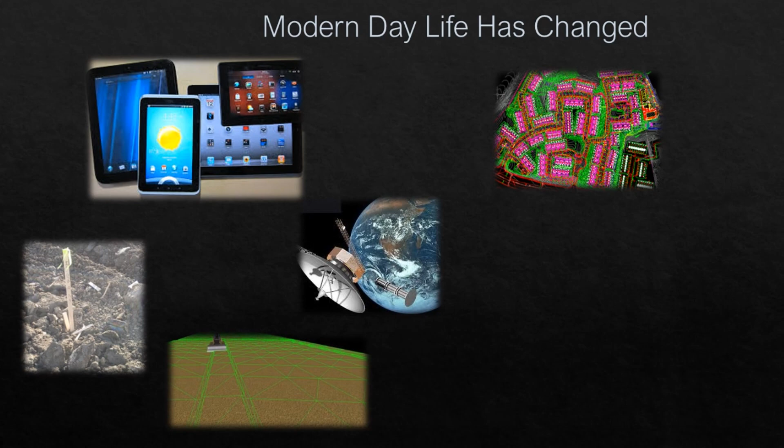Manual estimations, measurements, and staking has migrated to using laser levels, wire mesh renderings, and GPS drones and rovers. For vehicles and equipment, analog sensors have evolved to digital and local area networks, wireless, satellite, and cellular telematics reporting technologies, autonomous vehicles, and haul systems.

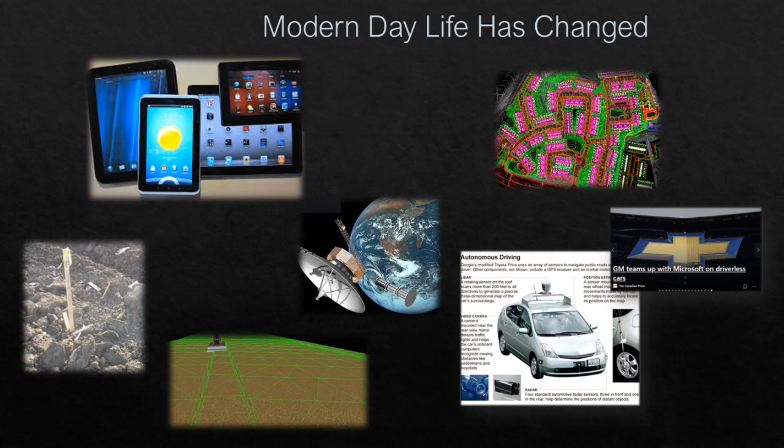Today, we are connected more than ever before, real time, and can make real time decisions and changes. We need repeatability, reliability, and accountability.

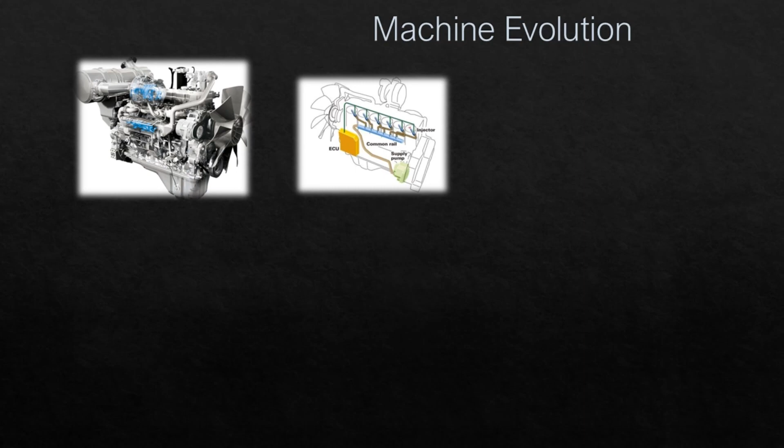Engine emissions have driven many developments in the equipment industry. In conjunction with engine design, communication between components has also evolved. From mechanical fuel pumps to electronically controlled unit injectors capable of multiple injections throughout the combustion cycle, these controls yield improved fuel economy, higher horsepower, and improved matching of engine, transmission, and hydraulics for increased performance and fuel productivity efficiency.

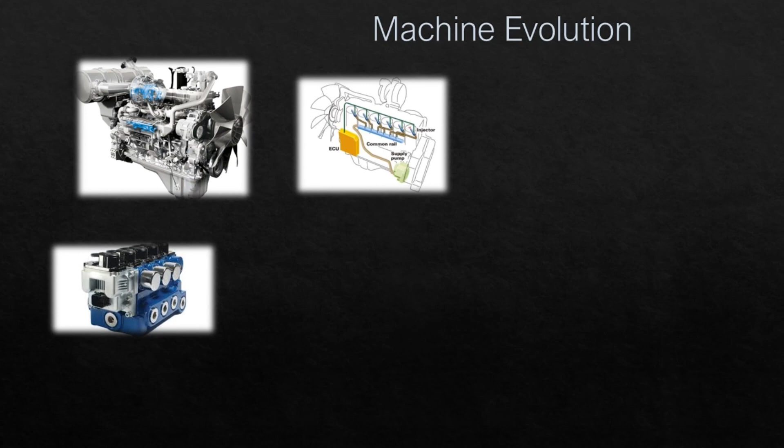Other improved technology applications, such as ultracapacitors, has opened the door to hybrid machines, not just cars, but also excavators and electric drive machines. Construction machines have evolved and continue to evolve.

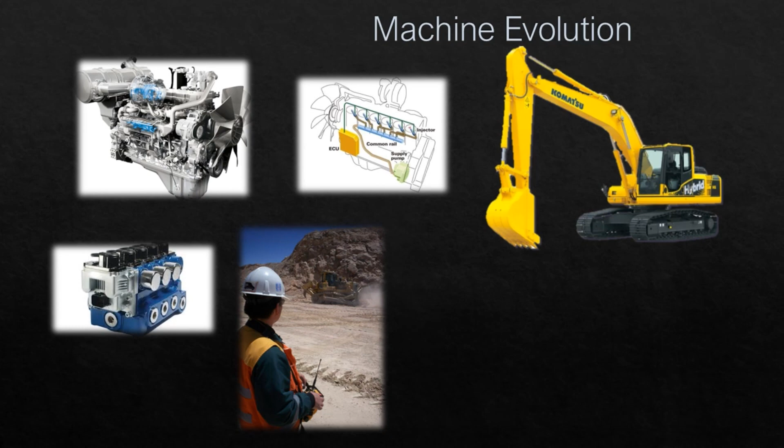Aside from engine emissions, a great deal of technology has been developed and implemented in large-scale operations in the mining world, where safety requirements are strict and fractions of a percentage point improvement have large and faster payback.

Enter autonomous haulage systems.

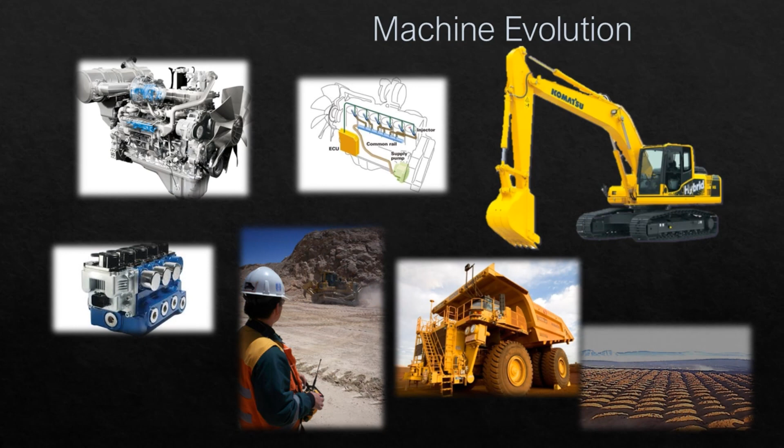It is interesting to note that driverless cars and on-highway trucks are still making their case for implementation, when in fact autonomous haulage has been in commercial use, not just trials, in the mining industry for over a decade, 13 years in fact. But it began much earlier, with Komatsu testing in Japan as early as 1990.

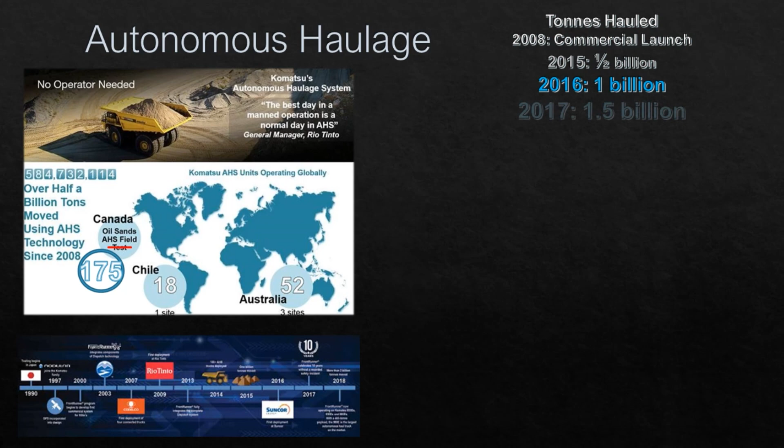Consistency, predictability, and long-term planning of mine sites has allowed the use of autonomous haulage, driverless haul trucks. With more than 150 machines right here in Canada, these mighty machines haul 300 to 400 tons per truck, eliminating errors and inconsistencies without human detriments.

Simply through implementation, sites experience an immediate 15+% improvement in reliability due to eliminating operator error, in addition to increased production. While we are not ready for complete autonomous implementation with construction equipment just yet, advances in technology are accelerating, and began with machine control in motor graders, dozers, and now semi-automatic grading in excavators.

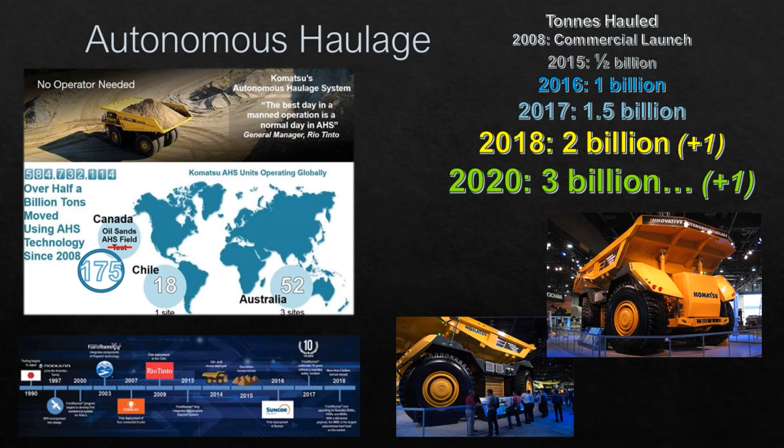Let's leave the autonomous haul trucks behind for now and look at other ways automated technologies can influence what we do. Let's take a moment to discuss some basic advantages realized when implementing grade control systems.

First, conventional grading. This relies heavily on the human element. Experience definitely helps. Unfortunately, hand-eye coordination leaves room for improvement, especially between grade stakes, even with well-seasoned operators. As a result, there is typically unplanned rework.

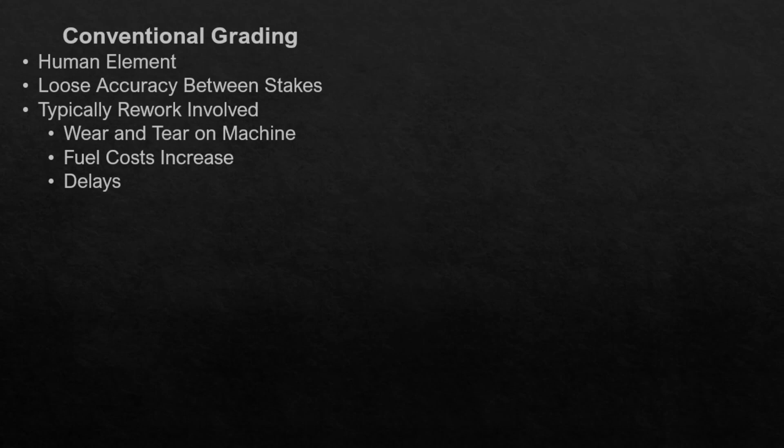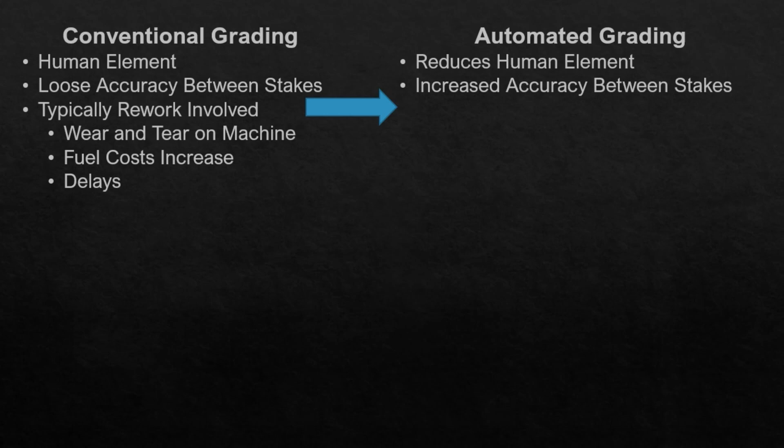This rework adds to extra wear and tear on a machine, increases fuel costs, and takes longer. You can probably guess that the addition of automated grading reduces the dependency on the human element and need for experience. Work performed is consistently more accurate over the entire application, which significantly reduces rework and thereby lowers wear and tear, reduces fuel, and speeds completions.

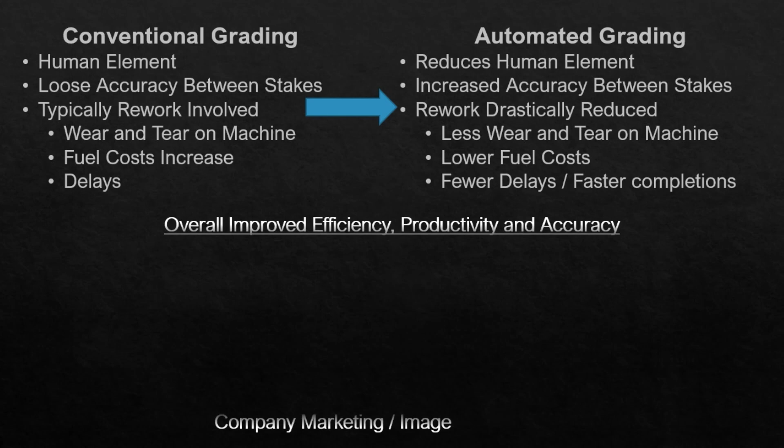With the addition of automated grading, there is an overall measurable improvement due to better use of assets, reduced—not eliminated—costs of surveying, and lower material costs.

Improved company performance adds to competitiveness, attracts new talent to the workplace, and helps bridge the experience gap. Existing operators perform better and are less strained by the end of the day. And improved results can improve the overall company image.

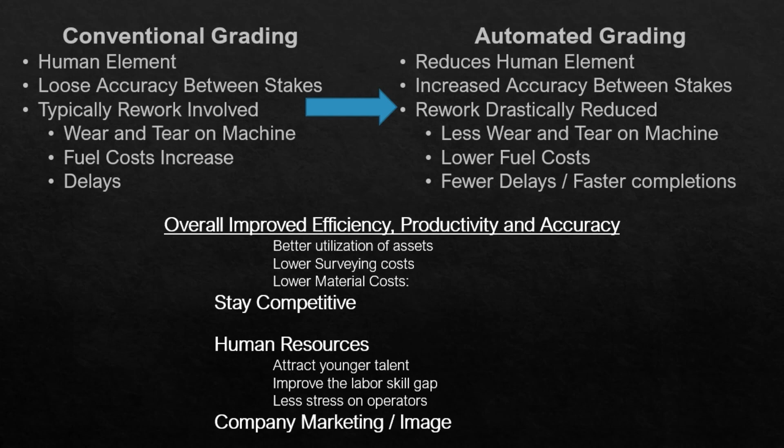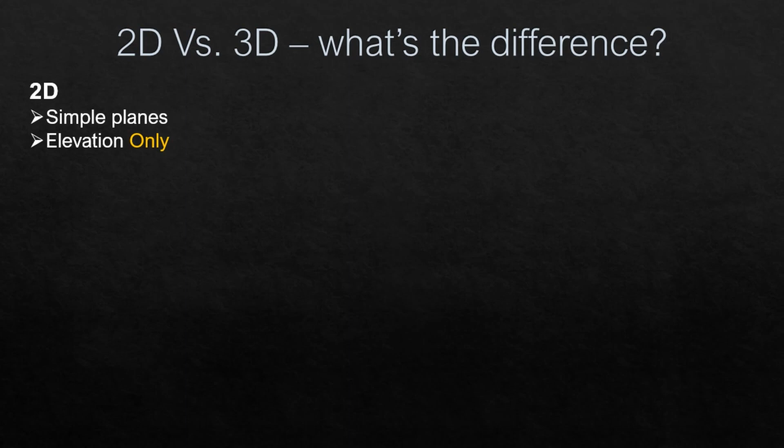A key differentiator in capability and application can be described with the terms 2D and 3D. For 2D, think elevation only, one point at a time. With no location relative to the position on a job site, there is need to re-establish a reference point, zero, or rebench at each new location or application.

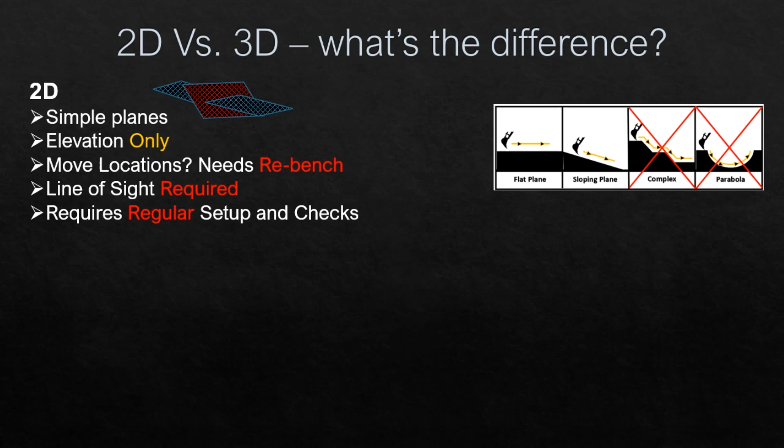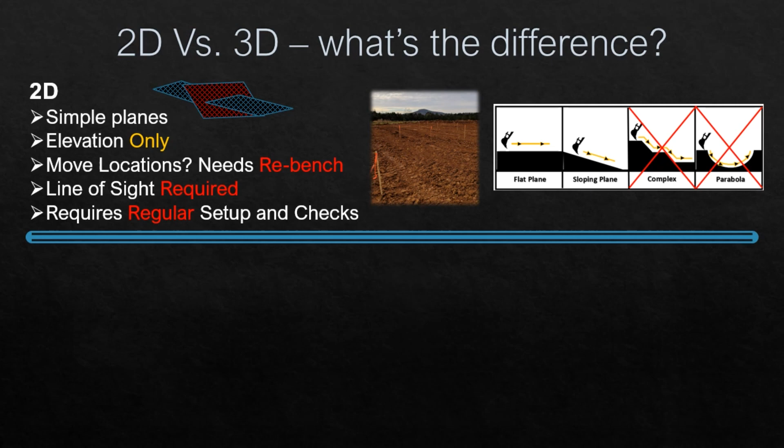For simple planes where grade does not change over large areas, lasers can accomplish one or two surfaces but still need regular checks. Lasers used for correction require line of sight. Without lasers, more reference points, for example grade stakes, need to be established. Creating more different slopes requires changing the setup for each new situation, but complex contours cannot easily be accomplished with only 2D systems. So what difference does 3D make?

Think GPS. Location on the job site is known, the horizontal reference, as well as the required elevation, vertical reference, at each location. For complex contours or jobs with multiple grades, 3D is a clear winner. Simply put, 2D is simple, flat surfaces. 3D can do everything 2D can, plus more complex contours. It is GPS referenced across the entire job without the need to constantly re-establish a reference point.

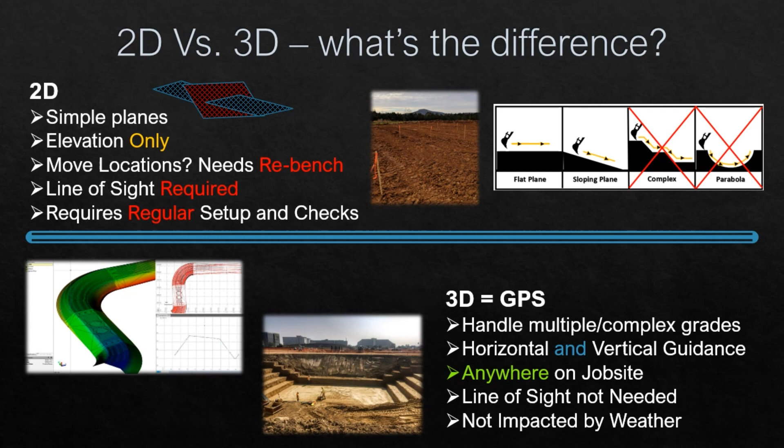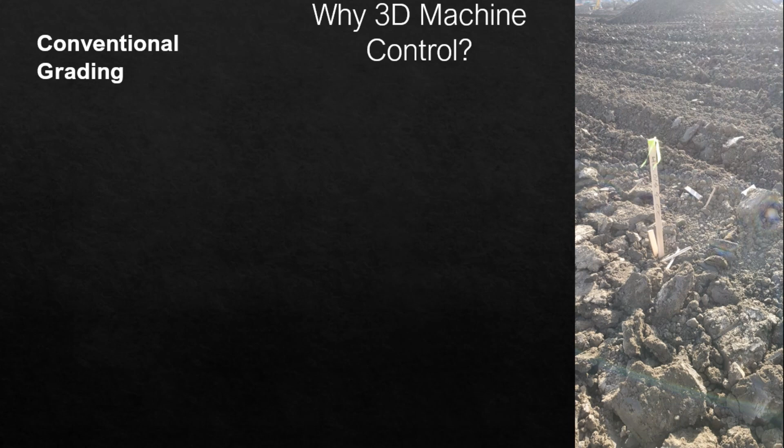Understanding the conventional grading process provides a basis for understanding why 3D machine control is necessary for anyone to remain competitive. Without knowing the location of design features and required grade on the job site, the operator is solely dependent on grade stakes. These only provide a small picture of the entire job site, and grading between stakes is still at risk for inaccuracy.

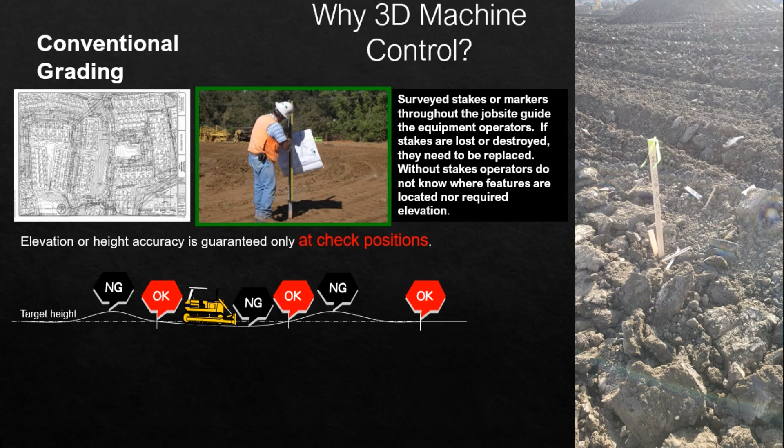Many times, this takes multiple passes and many restakes before final grade is achieved. Even a very skilled operator is challenged to keep accuracy at the blade within a tenth of a foot, or about the size of a golf ball. It goes without saying that the more material you move, the more cost you incur. It is best to move only as much as required.

So, what if we introduce more consistency to the construction job site? How can we achieve 1/10 of a foot accuracy consistently across the entire job site? Enter grade control.

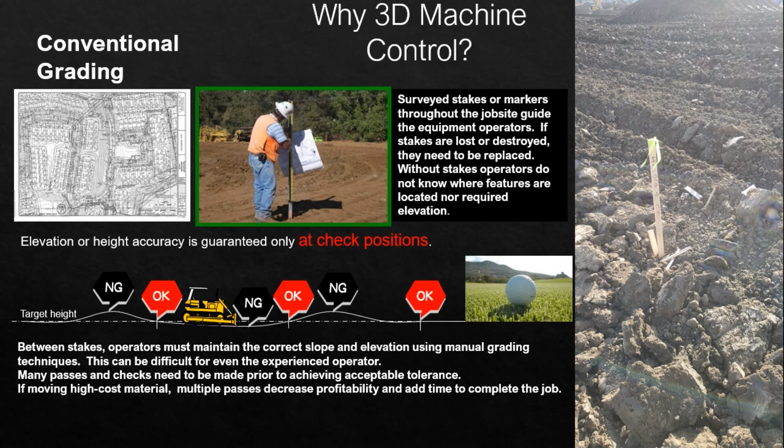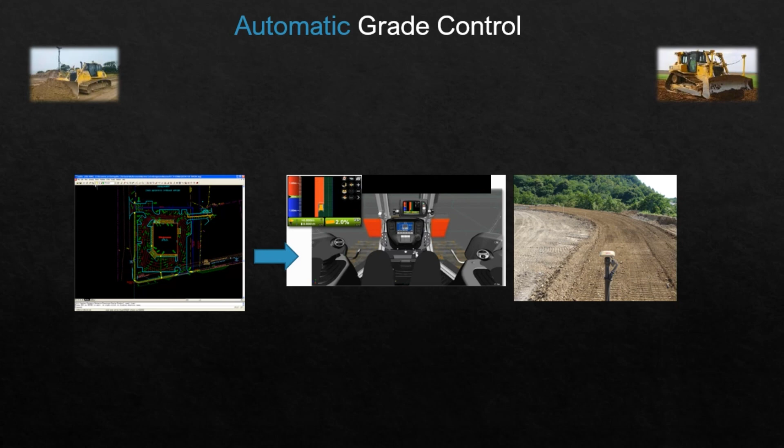With 3D grade control provisions, the plan can now be placed in the hands of the operator. A display shows where the machine is located on the proposed job site, as well as the entire site around the machine. Work around the job site is quickly determined for the day and where the site either needs fill material or needs stripping. With location on the job site known, stakes are no longer needed to show feature locations or proposed grade. The machine is capable of cutting to grade more accurately than before and thus substantially cuts down the time needed to complete a project.

3D grade control began with motor graders and has migrated to dozers, but what has become conventional grade control is good for finishing grade only. Enter intelligent machine control.

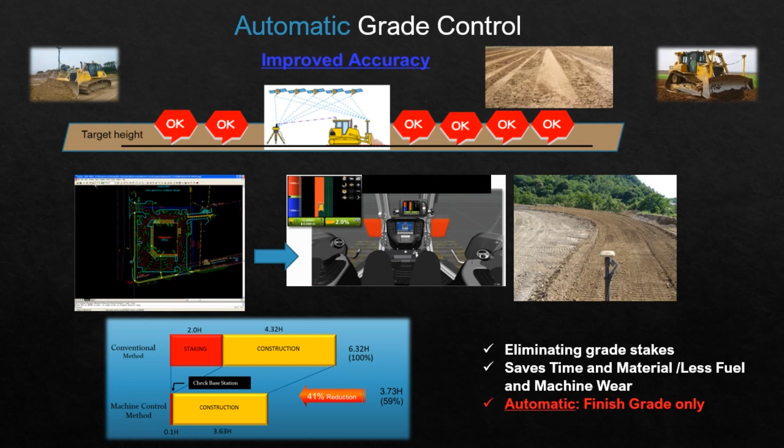This dozer is fitted with machine control. Can you tell? It looks as though some things we might be used to seeing are missing. This is IMC, Intelligent Machine Control, the next machine evolution, a truly integrated machine. IMC provides even more instant returns. Every operator can achieve better results like they have many more years of experience and maximize machine performance, not only on-grade performance. So what makes intelligent machine control the way of the future?

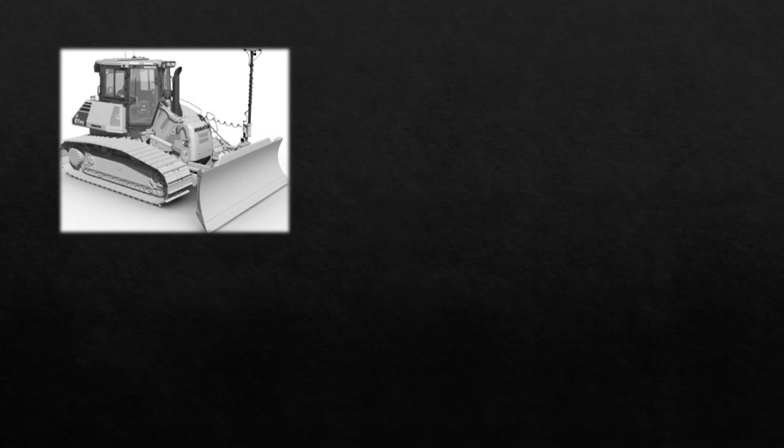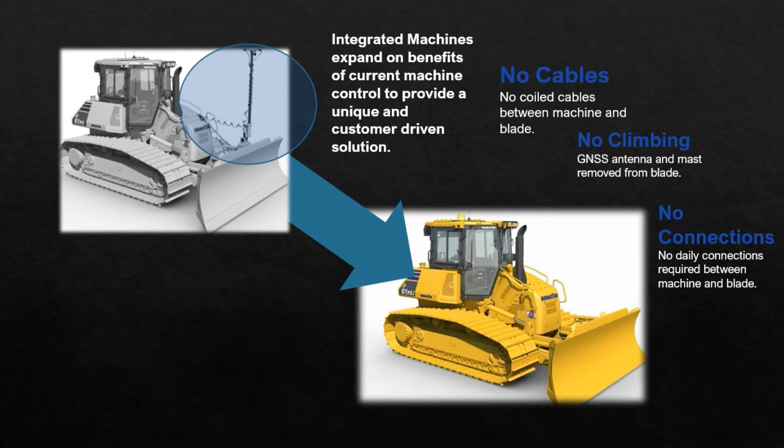Integration. Integration is much more than simply factory-installed mounting points, harnesses, hydraulic hoses, and valves to complete a grade control system. As a start, an integrated machine incorporates sensors to eliminate external harnesses that aftermarket systems cannot avoid. No cables, connections, or climbing is necessary since no components are installed or removed at either end of the workday. There are benefits to pre-wired machines, but the difference is intelligent machine control integrates with the main machine to maximize overall machine capabilities and performance, and therefore maximizes production and improves finished product, much more than simply finish grading. This first truly integrated dozer appeared on the market in 2013.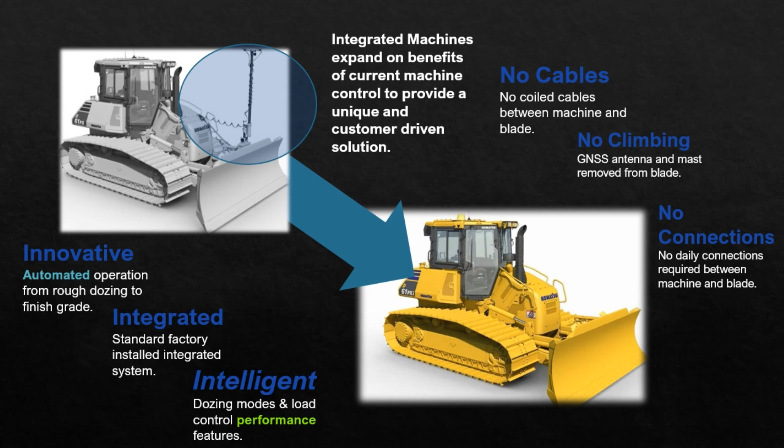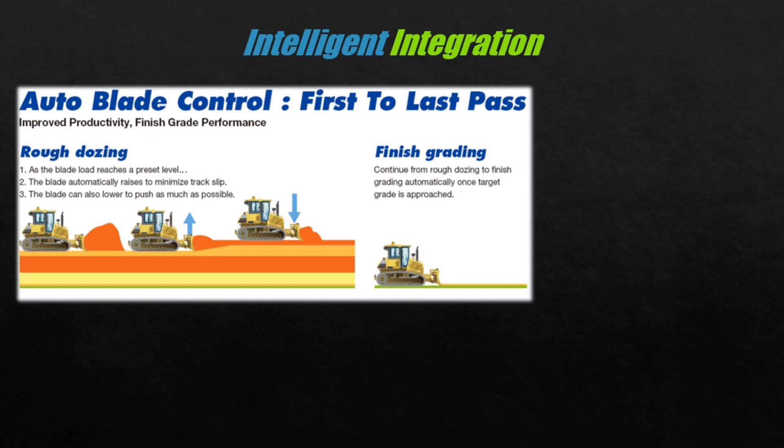What does intelligent integration do? In combination with integrated sensors, in 2013, Komatsu developed the first operator-selectable dozing modes. These dozing modes optimize the dozer for various applications and load types to achieve maximum production, even used long before reaching finished grade. These modes allow for the integrated machine to engage automatic blade operation without operator interaction from rough cut all the way through to the final finish pass, first pass to last pass.

Traditional aftermarket systems or factory-installed machines cannot engage automatic blade control until approximately half a foot from the target surface. In short, this means maximum blade load for each pass from the beginning of the job provides maximum material movement and more utilization of the machine automated controls.

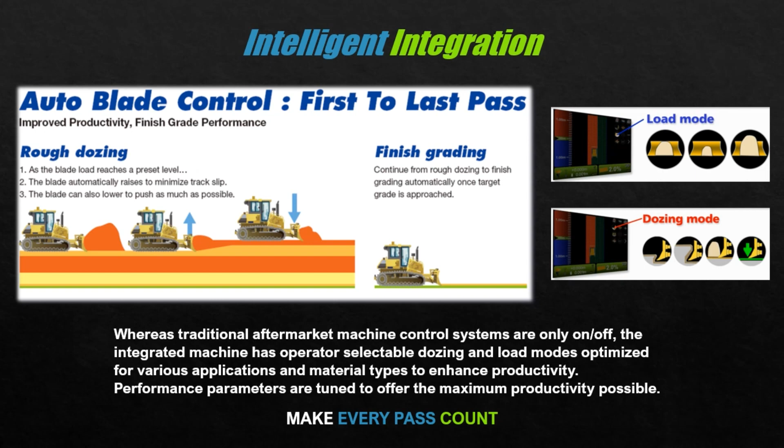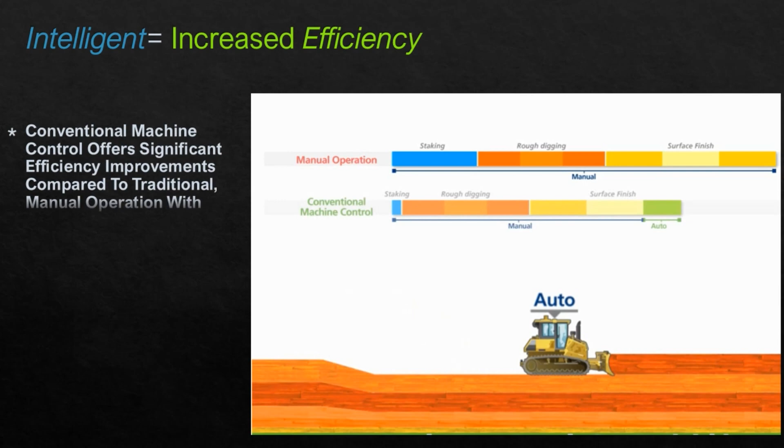How does intelligent machine control compare to grade control systems? Much of the advantages of conventional grade control systems are applicable: reduced staking, improved grading. But intelligent machine control goes further, reducing the passes and time before the finishing pass.

A quick review. Going beyond grade control to intelligent machine control means using assets more effectively through automation in more applications.

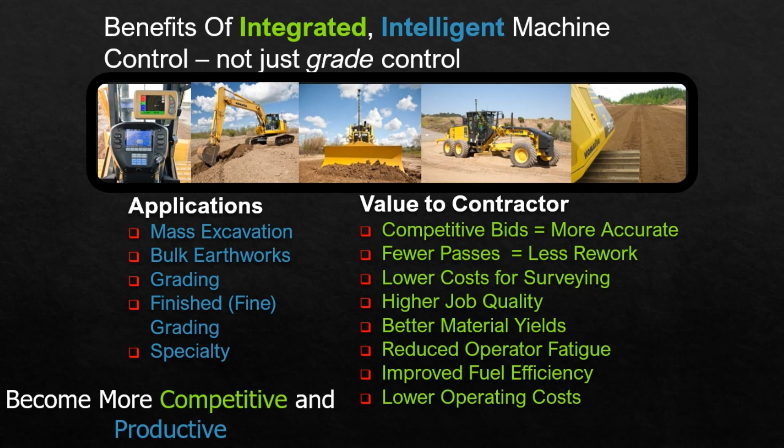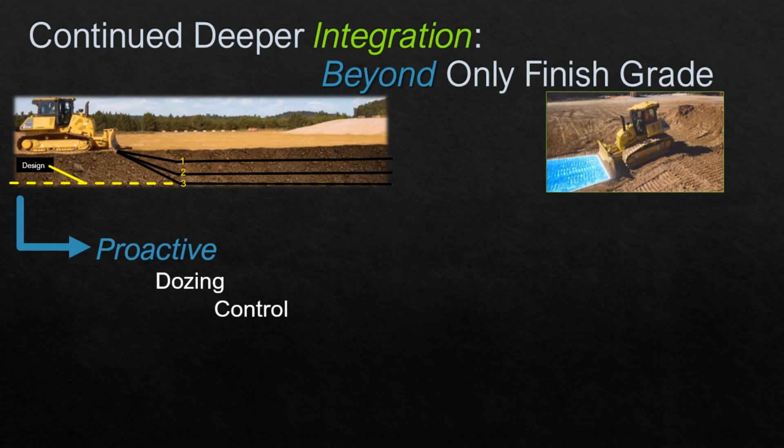It's been said that humans have prospered because of two main capabilities tied to vision: physically seeing danger and also vision to anticipate the future. In the next evolution of intelligent machine control, we in effect give a dozer eyes. By knowing the contours of the surface ahead of the machine, it can anticipate and proactively adjust the blade as it encounters the contour, rather than waiting to feel the load increase, then making adjustments.

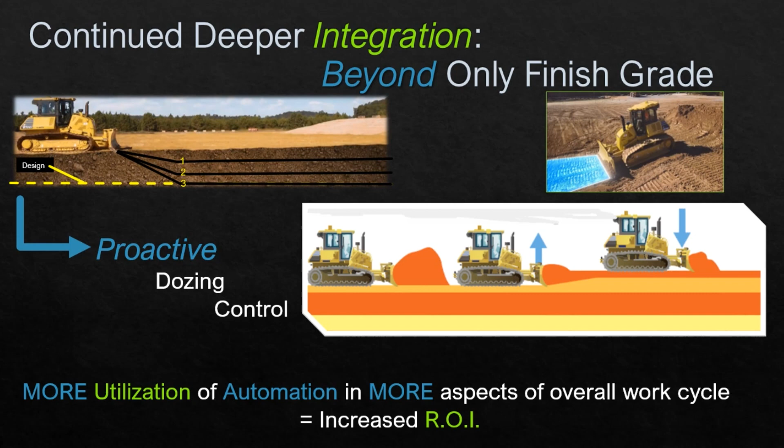Knowing the contours of each step of the job can improve consistency as the job progresses. Consider backfilling, where specific lifts are needed to achieve compaction specifications. Conventional grade control would simply operate at finish grade and fill in batches, or need to be manually overridden by the operator. Manual, not automatic.

With proactive dozing controls, lifts can be pre-programmed and reference the existing surface to achieve consistent lifts while still matching the finished design as subsequent passes are completed. Fewer overall passes, consistent, repeatable results, and less rework using the automatic controls, much more.

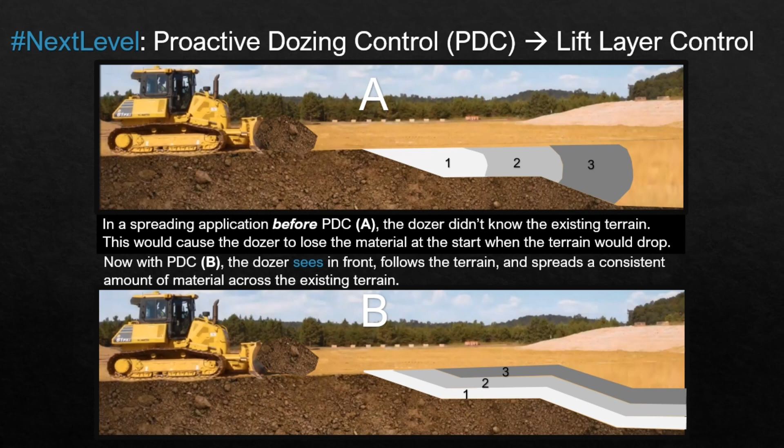Automation continues to evolve even aside from managing finish grade and increasing production. By expanding the integrated machine control technology, additional inputs, aside from simple steering, assist dozer direction control while dozing. In this example of a new feature now available in the marketplace, the tilt steering function automates blade control, reducing operator input in order to maintain straight travel, all while protecting the finished grade surface.

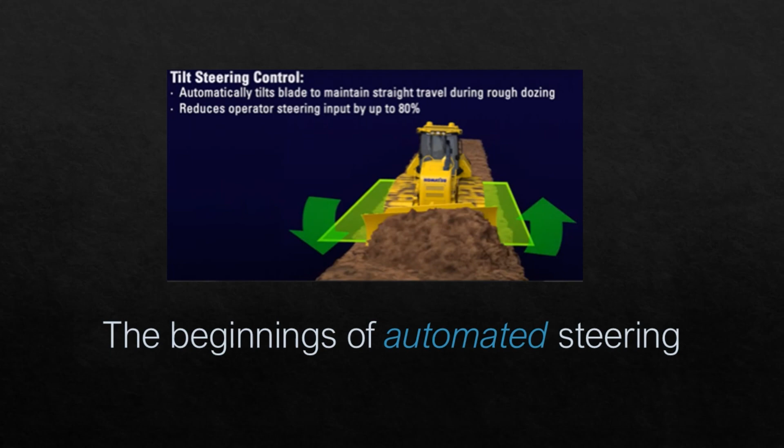Up to this point, we have looked primarily at automation advancements in one machine, the dozer. Until recently, excavator grade related technology had been underutilized and not accepted widely, mainly due to the lack of automation. Light bar style indicate systems would assist an operator in poor visibility or blind situations, or where other equipment could not be used, but lacked the response and performance needed to make substantial payback without a lot of operator skill and patience. In 2014, a significant change occurred in excavator grading technology: the addition of semi-automatic grade assistance.

Here is an illustration of how automatic control, automatics, prevents over-excavation. Called auto stop. When lowering the boom, automatic control takes over, stopping the boom lowering to prevent any further digging. Similarly, when curling the bucket, auto stop automatically stops the bucket curling action to prevent further digging.

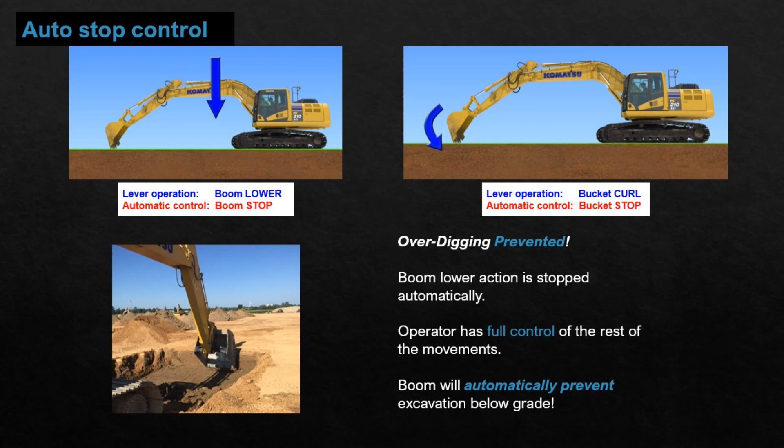Preventing over-excavation is good, but what can be better? Auto grade assist. In auto grade assist mode, semi-automatics assist the operator by automatically raising the boom to maintain grade, all while the operator has full control of the arm and bucket functions.

This function assists or complements the operator's natural digging and grading movements and prevents over-excavation rather than restricting operator controls. The result? The target surface is protected from the entire bucket profile, making a smooth, undisturbed bottom. Less rework, less compaction, and less fill material required with accurate grades saves time, labor, and material costs.

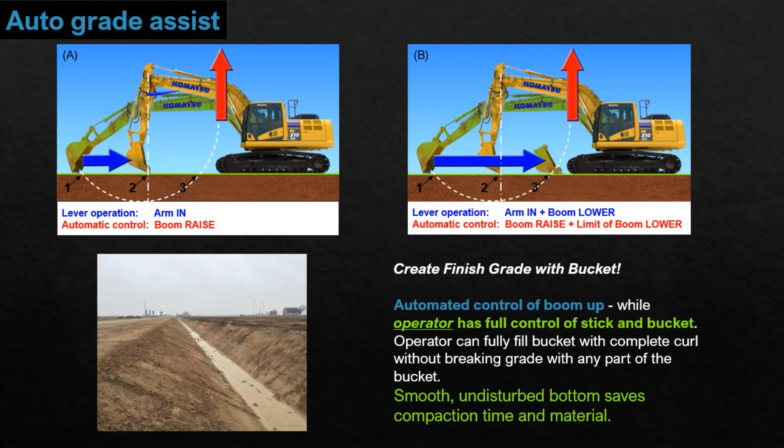Let's begin to look at how 3D excavator automation technology is applied. Do you see opportunities to improve in today's processes? Grade stakes add time and cost. Broken stakes add delays and increase cost. Each check requires additional time and personnel.

Similar to intelligent dozers, 3D intelligent excavators can be freed from grade stakes. Accurate grade control not only increases accurate production, but reduces the need for in-the-trench checking when grading with confidence.

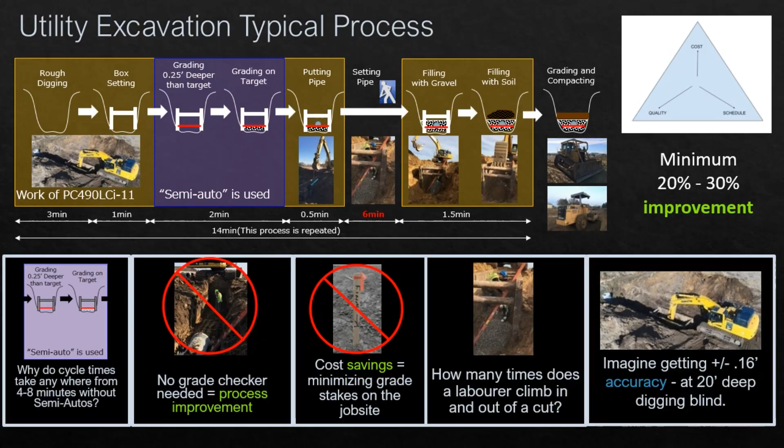Having seen how finished grade can be protected and achieved, here is a simple, significant advantage when automation is applied to the real world. Simple calculations for even one-tenth of one foot of over-excavation, multiplied by material cost to fill that over-excavation, adds up very quickly. This valuation also does not consider extra time and/or delays for extra deliveries or additional site considerations such as logistics and restrictions.

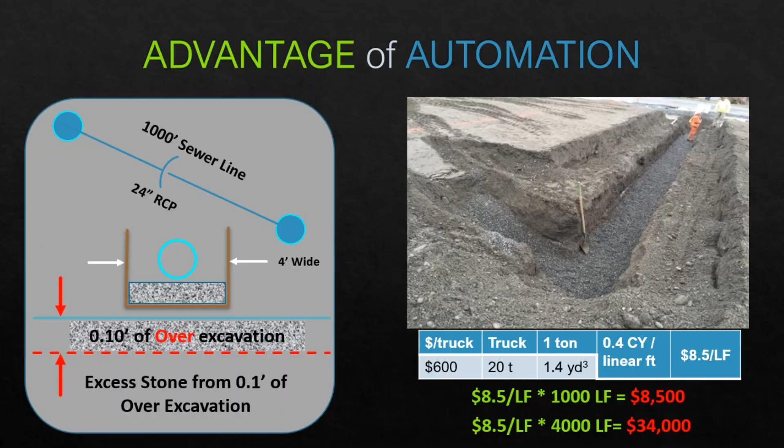Understanding a little more about how the semi-auto grade controls work in an excavator, let's look at a couple of applications to make use of this automation.

One might assume that a digital design file would be required for every step when automated systems are used. Quite the contrary. Even when working with existing structures, a 3D machine control excavator can be quickly and easily inserted into the job. Here is an example of connecting two structures, an existing to a proposed. In just a couple of steps while in the machine, the operator can add a simple design profile from the existing structure to the next with the required consistent slope.

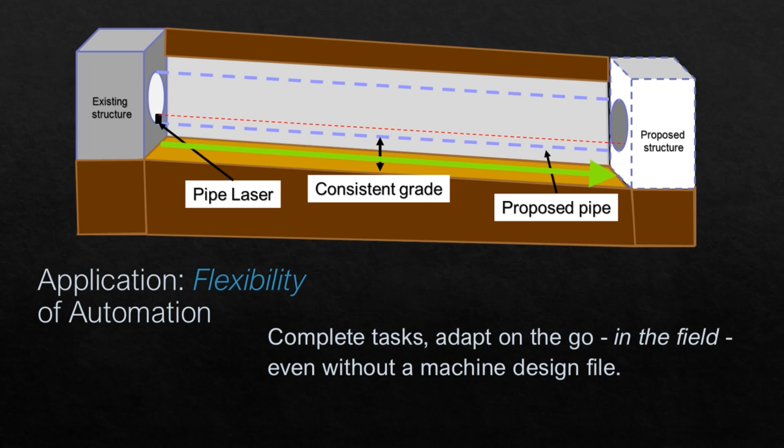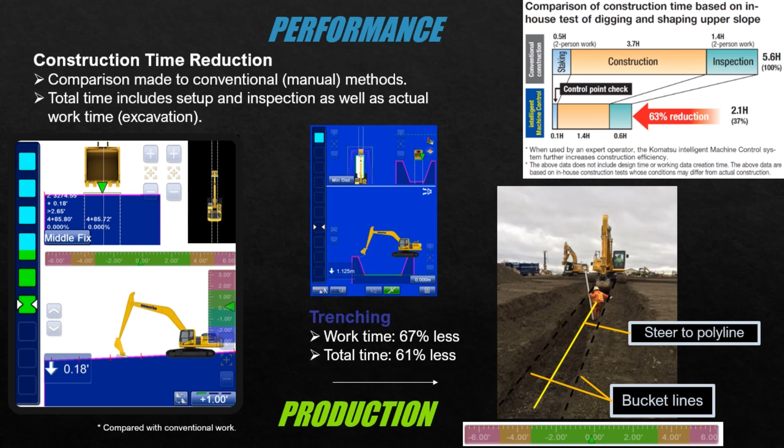How can construction time be improved further, even aside from reduced staking? Technology assists the operator in additional ways when combined with automation. For digging a pit or a trench, total time is reduced by both actual production improvement as well as setup and inspection time. Aligning a machine accurately to the trench line without need for repeated staking and additional maneuvering improves setup as well as accuracy for the trench bottom and wall construction. Bucket lines extend for visibility and also restrict excavation outside the trench design, keeping alignment and reducing over-excavation.

Using technology, processes can be further improved. The trench bottom is excavated according to design with no excess removal. No backfill or compaction or extra bedding materials are required to fill in gaps. Placing bedding materials with precision lifts that parallel the trench bottom further improves overall integrity, consistency, and optimizes material use.

Lastly, imagine using the excavator to not only complete the excavation, preset 1, bedding material placement, preset 2, but as an additional check on pipe position accuracy, preset 3. Cycling through these presets speeds transitions between each job step with repeatable accuracy.

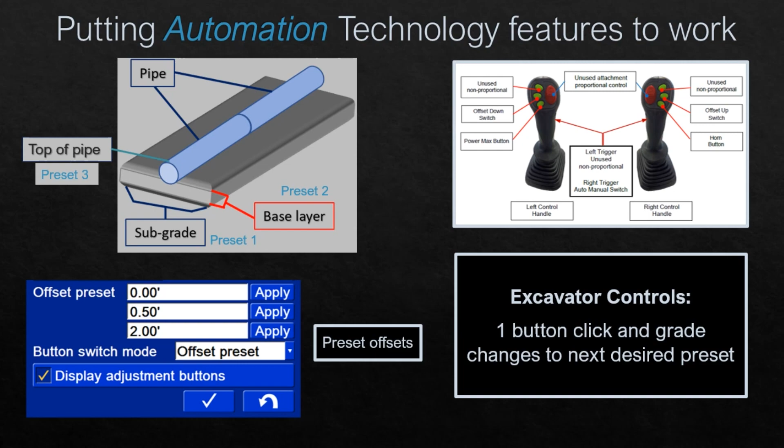Real-world studies have shown improvements in production and efficiencies through the addition of technology and assisted automation systems. These systems offer new capabilities and ways of performing job functions that go beyond simply machine utilization and production improvements. New applications are being discovered and implemented. These new applications can not only increase competitiveness for typical jobs, but may also open the door for new opportunities for niche work.

Some applications are off limits to personnel, even in machines. For those situations, remote-controlled machines are being used, like this dozer, in an area where a slide could occur. Combined with integrated intelligent machine control, the operator does not need the feel of the seat in order to maximize productivity, because the integrated machine optimizes performance. With future job planning, it could very well be feasible to automate dozing actions and more.

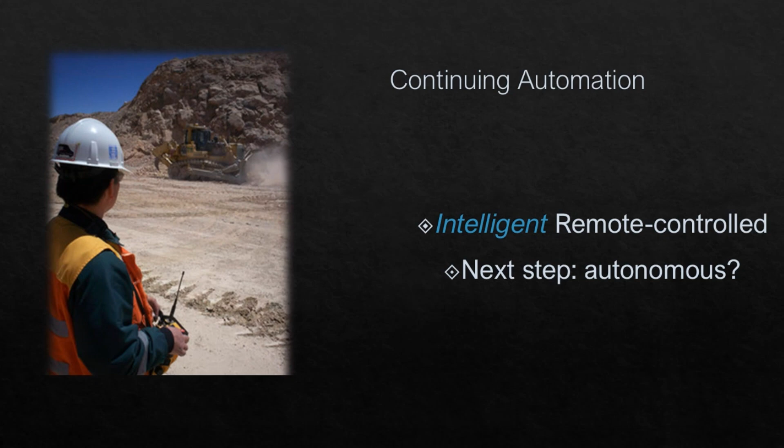Automation considers not just equipment solutions, but also digital solutions. A 20% improvement using machines does not equate to a 20% improvement for the entire project. Digital solutions also impact outcomes.

Digital opportunities exist to improve office processes and communication to and from the field, including retrieving as-built data for progress reports throughout the entire job and communicating design updates remotely, directly to machines and personnel. Each step of these processes can be digitized and therefore transforms the entire project and management.

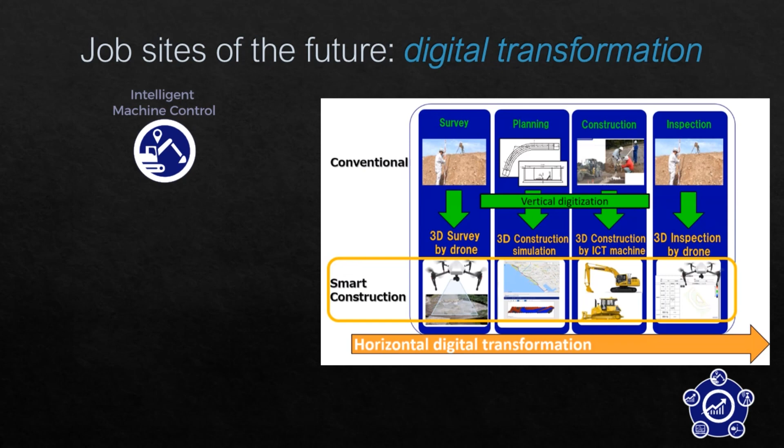Even before going to the job site, planning, including bidding, has a significant impact on outcomes. Using a drone to survey a job site pre-bid can provide valuable details that may not be included, or estimates may not be as accurate.

Analyzing and communicating data to and from, and combining with intelligent machines and other GPS hardware, reduces surprises and augments processes. Captured as-built data from machines and inspections completes and verifies results for compliance and accountability. New best practices are developed and repeated for consistent results.

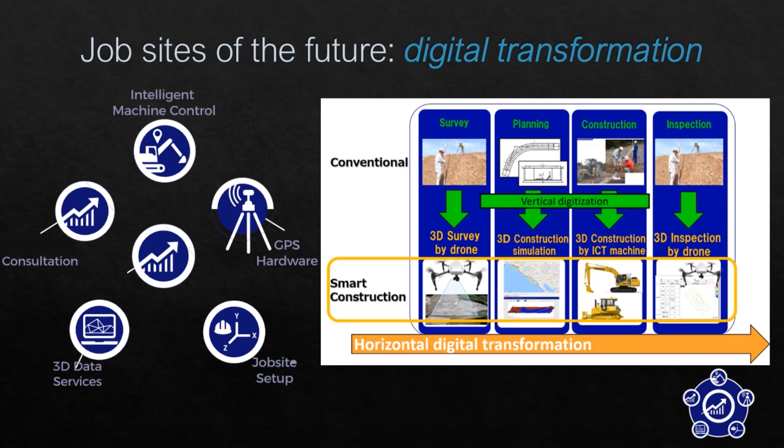So what's next? We have seen that automation has expanded in both dozers and excavators. More original equipment manufacturers will increase deeper integration with their products. We have seen that real, as-built production data is available for the gathering and is beginning to flow to the office for processing. With more real-time data, decisions can be made and problems can be solved faster.

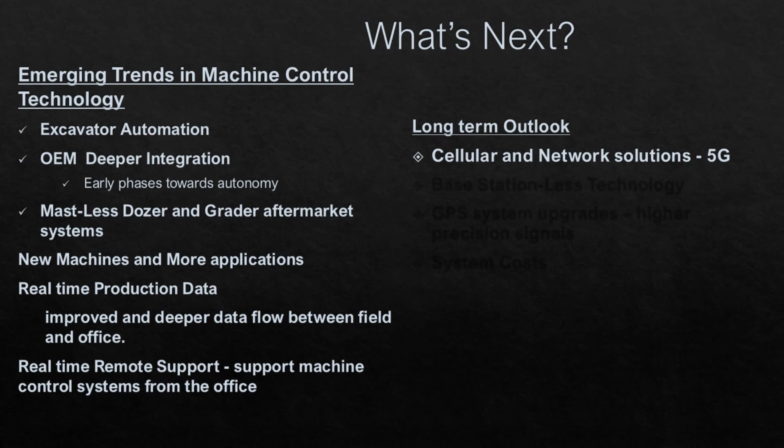In the longer term, the outlook points to the Internet of Things and implementing 5G wireless networks. Higher wireless speeds and increased GPS signals will increase accuracy and enable movement away from local base station correction requirements. And, as technology advances, cutting-edge systems will become even more affordable over time.